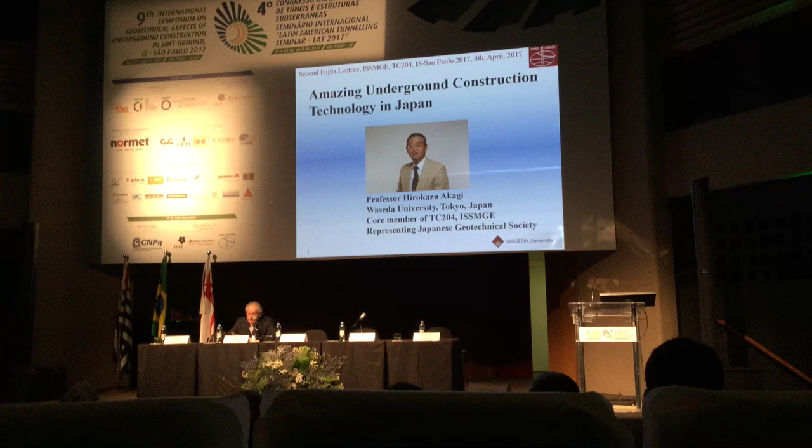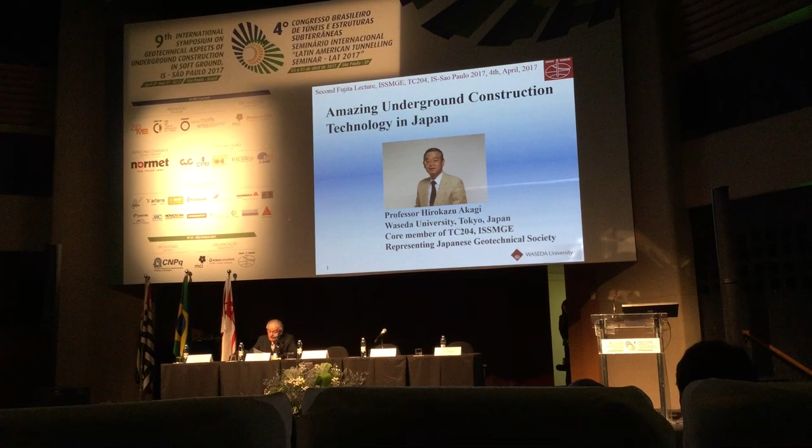As chairman, Professor Fujita organized a one-day international symposium in New Delhi, just before the 13th International Conference. This was an outstanding success, bringing together specialists in underground construction from many countries. Following that success, it was decided to initiate a series of two-day international symposia on geotechnical aspects of underground construction in soft ground, with a third day devoted to technical site visits to underground construction projects.

This international symposium has been held every three years over the past ten years, as follows: 1996 in London, 1999 in Tokyo, 2002 Toulouse, 2005 Amsterdam, 2008 Shanghai.

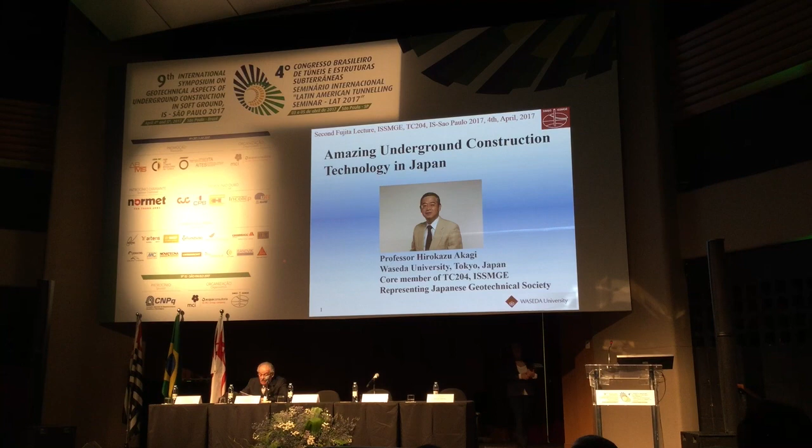For each of these international symposiums, there has been a wealth of information published in the proceedings, with many hundreds of papers on a wide variety of underground construction topics of major technical interest, mainly on case histories and new research. Professor Fujita was the inspiration for this highly successful international symposium, and we all owe him a great debt of gratitude.

At the next international symposium in May 2011, to be held in Rome - this was written in 2010 - we will fondly remember Professor Fujita as the father of TC28 and a great inspiration to us all.

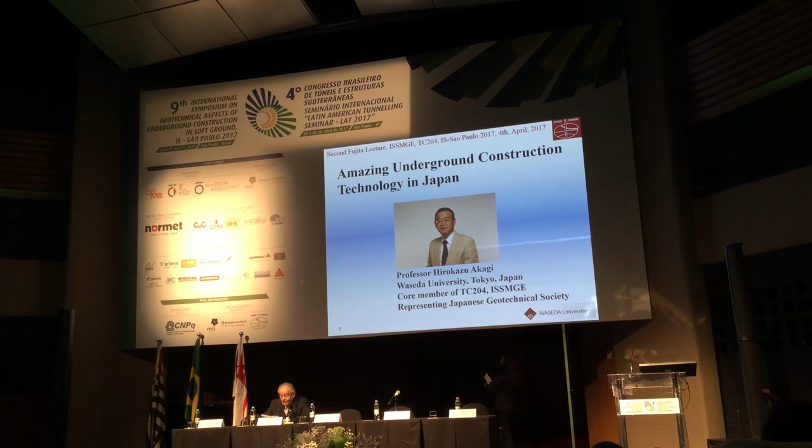It will be proposed that a prestigious lecture in memory of Professor Fujita, to be named the Keiichi Fujita Lecture, will be delivered at each subsequent international symposium on geotechnical aspects of underground construction in soft ground. The Fujita Lecture will be a lasting tribute to Professor Fujita's remarkable contributions.

Professor Fujita's wisdom and experience, combined with extraordinary energy and a great sense of humor, will be sorely missed. Those have been the words of Professor Robert Mair in September 2010, and this is a full explanation why we are here today to listen to a Fujita

lecture by Professor Hirokazu Akagi. It's not a coincidence that Professor Fujita and Professor Akagi are both from the Japanese society or the

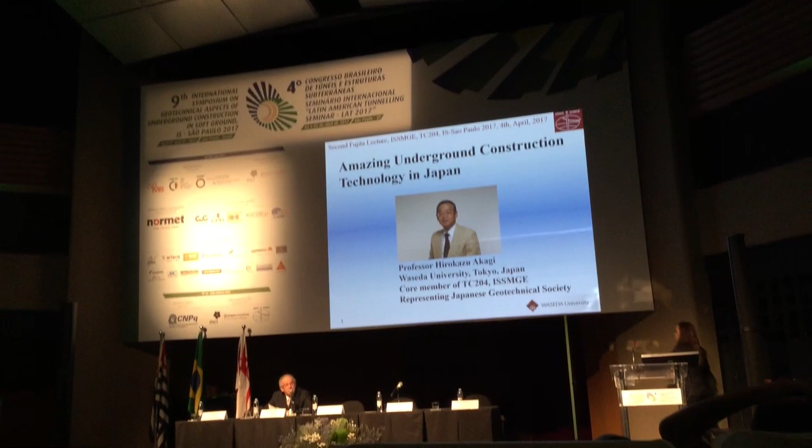It's not a coincidence that Professor Fujita and Professor Akagi are both from the Japanese community. Certainly this is due to the excellence of the geotechnical work done in Japan, and the Japanese society is one of the most active societies existing.

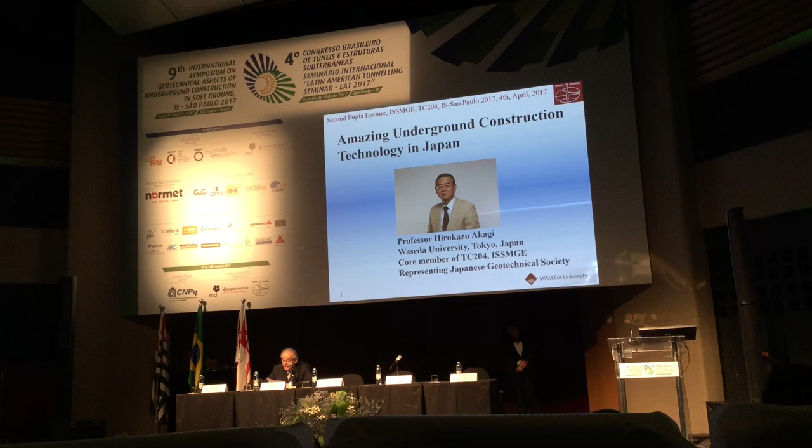Professor Fujita was born in Japan. He was educated at Waseda University. He was a lecturer, associate professor and professor at Waseda University, and a visiting researcher at the University of Canterbury. He was a board member and vice chairman of the Tunnel Engineering Committee of the Japanese Society, general reporter for some international conferences, and he had many research topics.

And I would like to invite Professor Akagi to deliver his presentation.

Thank you, Mr. Chairman. I'm Hirokazu Akagi, and I'm coming from Waseda University, Tokyo, Japan.

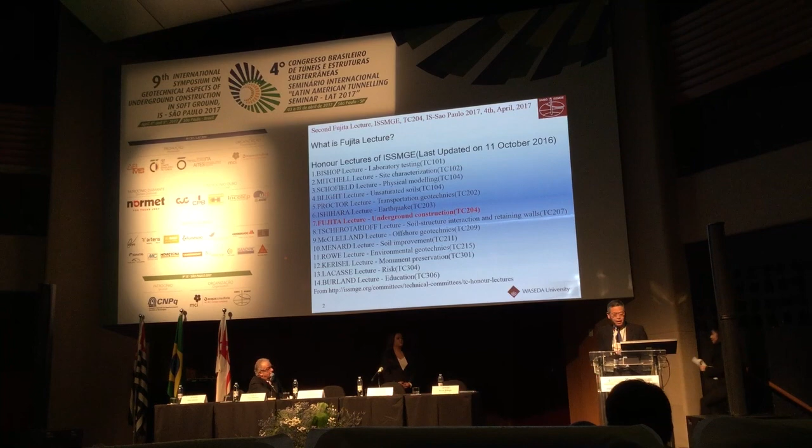I'm one of the core members of TC204, ISSMGE, and also representing the Japanese Geotechnical Society here. As already explained by the chairman, I'll show you what this lecture is.

These are the lists of honor lectures of ISSMGE, which was updated last year.

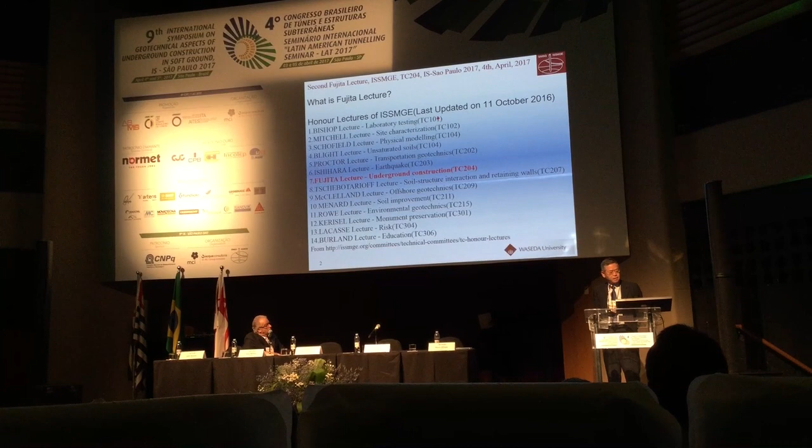Each Technical Committee of the International Society has its honor lecture. For example, TC101, on laboratory testing, has the Bishop Lecture. TC102, on site investigation, has the Mitchell Lecture. TC104 has the Schofield Lecture. TC106, unsaturated soils, has the Blight Lecture. TC202 has the Proctor Lecture. TC203 has the Ishihara Lecture. And our own TC204 has the Fujita Lecture as well.

And also Tschebotarioff, McClelland, Menard, Rowe, Kerisel, Lacasse, Burland - very distinguished names are here.

In 1994, he delivered the state of the art report on soft ground tunneling and various structures at the 13th International Conference on Soil Mechanics and Foundation Engineering in New Delhi, India. The same year, TC28, now TC204, held its first symposium in New Delhi.

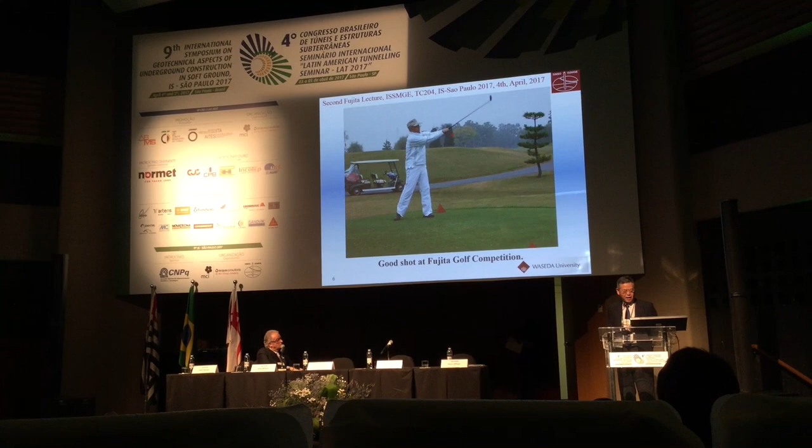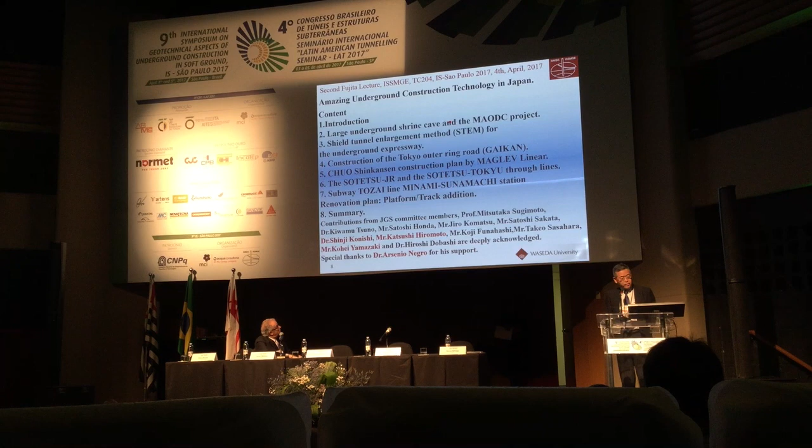In the first chapter, I show you a simple introduction of my lecture, and I'll cover 6 big projects which are done mostly in Eastern Japan.

The first project is large shrine cave and the MAODC project. MAODC means Metropolitan Area Outer Discharge Channel Tunnel Project.

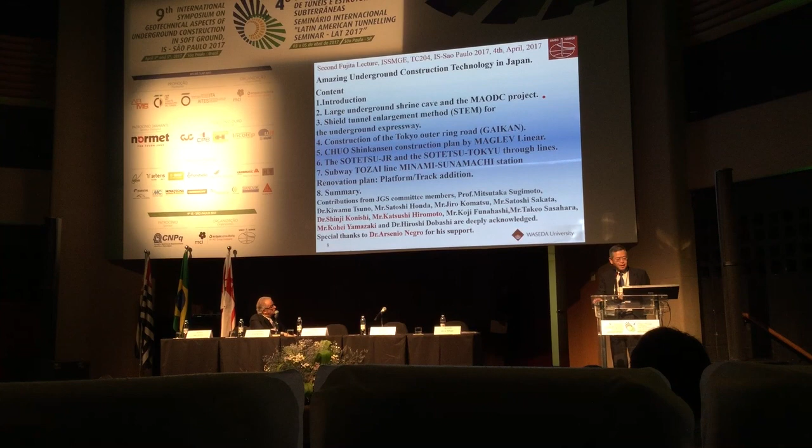The third chapter, I will show you Shield Tunnel Enlargement Method, STEM, for the underground expressway. The fourth is the construction of Tokyo Outer Ring Road, which is named Gaikan.

Also, the fifth topic is on Chuo Shinkansen construction plan by Maglev Linear. And sixth, the Sotetsu-JR and the Sotetsu-Tokyu through lines.

As the seventh topic, is subway Tozai line, Minami-Sunamachi Station, renovation plan, platform, and track addition. And finally, I'll show some summary.

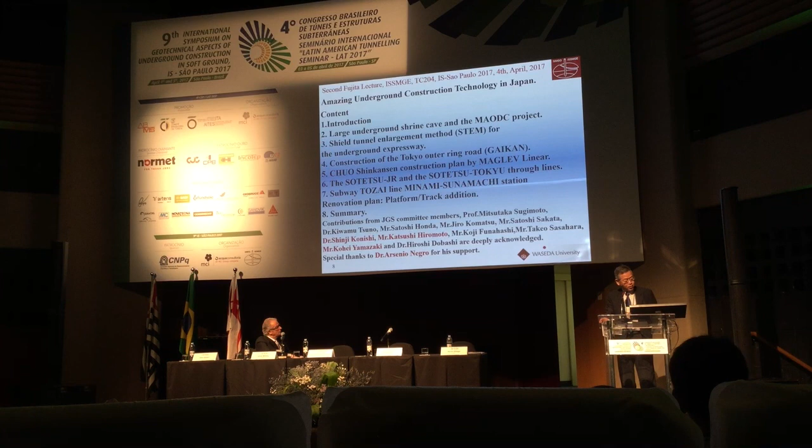For this second lecture, JGS, Japanese Geotechnical Society, has organized a special committee to prepare this lecture: Professor Mitsutaka Sugimoto and Dr. Kiwamu Tsuno and Mr. Satoshi Honda and Mr. Jiro Komatsu and Mr. Satoshi Sakata and Dr. Shinji Konishi and Mr. Katsushi Hiromoto and Mr. Koji Funahashi and Mr. Takeo Sasahara and Mr. Kohei Yamazaki and Dr. Hiroshi Dobashi, deeply acknowledged.

And also, I have to show special thanks to Dr. Arsenio Negro for his support.

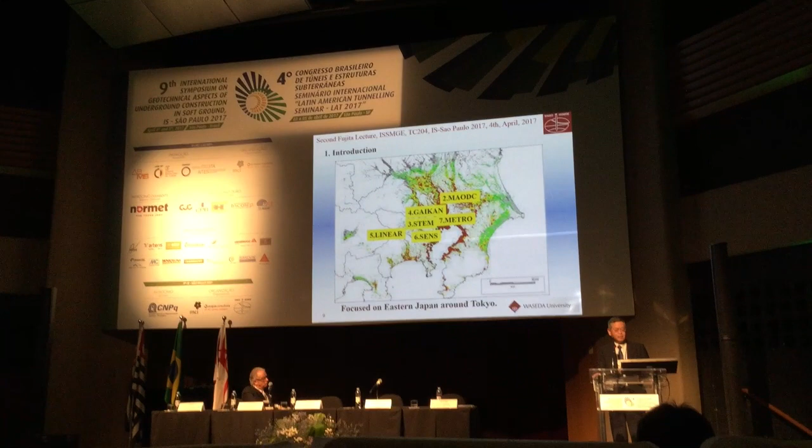And the seventh one is the renovation of existing subway stations by the Tokyo Metro. I show here that all the topics are focused on Eastern Japan around Tokyo.

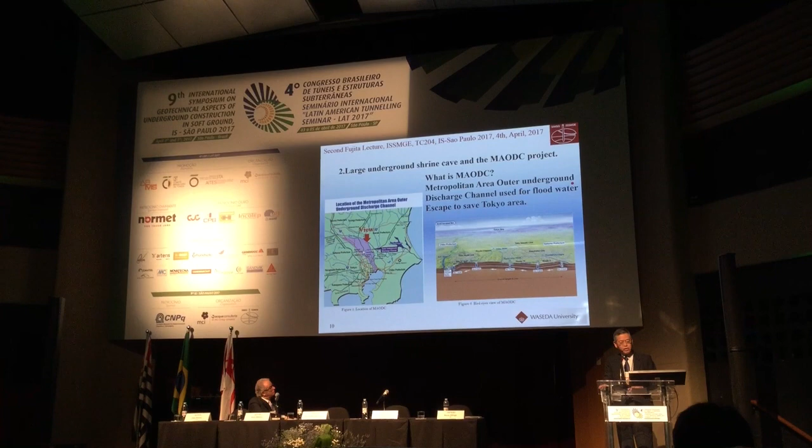As chapter 2, I show the large underground shrine cave and the MAODC project. What is MAODC? Metropolitan Area Outer Underground Discharge Channel, used for flood water escape to save the Tokyo area.

This line shows the discharge tunnel. In other words, this is an underground river which escapes the flood water to save the Tokyo area.

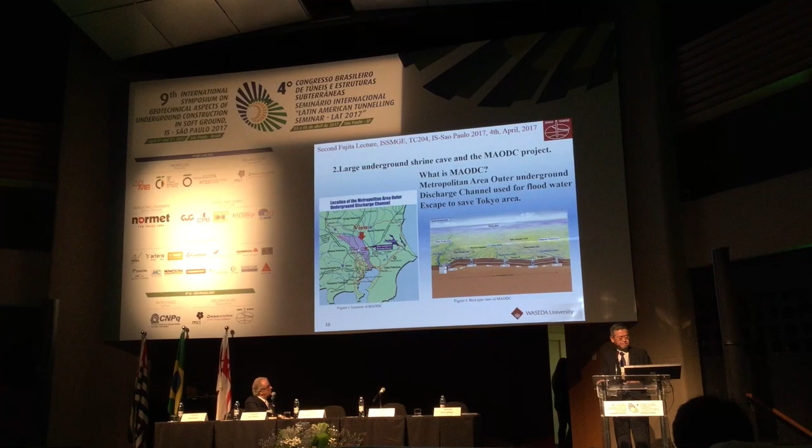This figure 2 shows the bird's view of MAODC, viewed from this direction. That's why the flood water is coming from the right-hand side to the left-hand side.

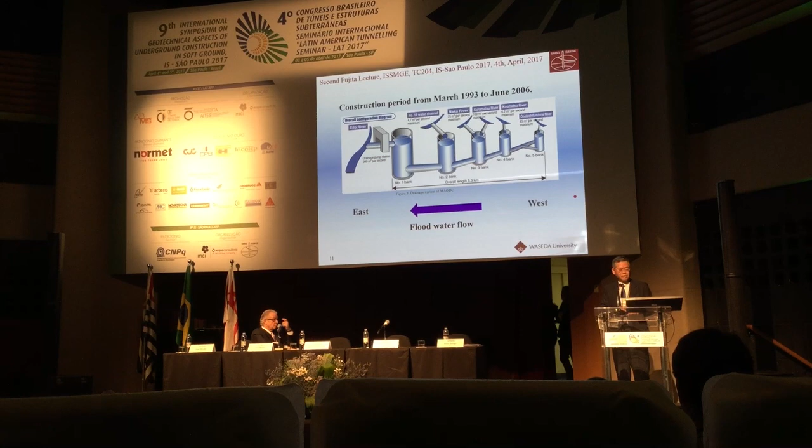This slide shows the magnification of the MAODC. This underground river was constructed from March 1993 to June 2006, almost 10 years ago.

There are 5 big shafts, which are named as banks. These 5 banks are connected by the shield-driven tunnel, and flood water is coming from west to east, and the flood water is discharged to this river, Edogawa.

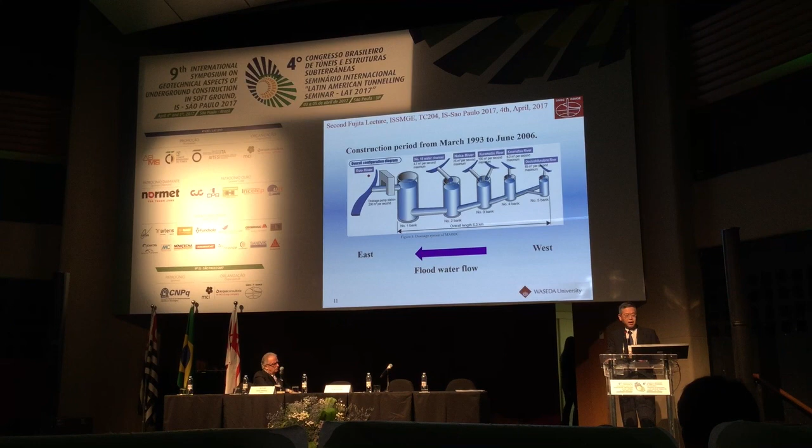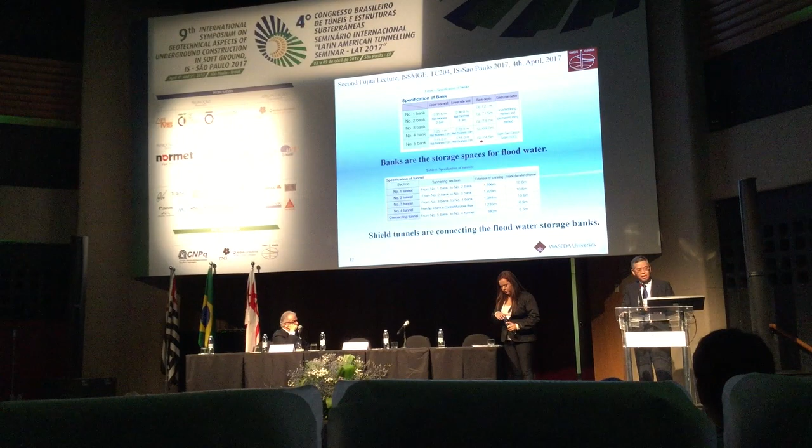These tables show the specification of the shaft bank and also the tunnel which connects these shafts. Banks are the storage spaces for flood water, and the inner diameter is around 30 meters shown here, and the depth is around 72 meters from the ground surface. Quite large and deep shaft.

Also, shield tunnels have a diameter around 10.6 meters, and extension of 1.4 kilometers and almost 2 kilometers, as shown here. Shield tunnels are connecting the flood water storage banks.

This picture shows the bank shaft, deep around 70 meter depth and large diameter, and the 30 meter diameter has been built by using the inverted lining method, the top to bottom excavation as shown here, using the quite thick wall, thick diaphragm wall method.

This slide shows the large diameter, around 12-meter slurry TBM was employed, and special concrete segments have been easily and rigidly connected by the push and bonding connectors, which reduces the construction period as shown here.

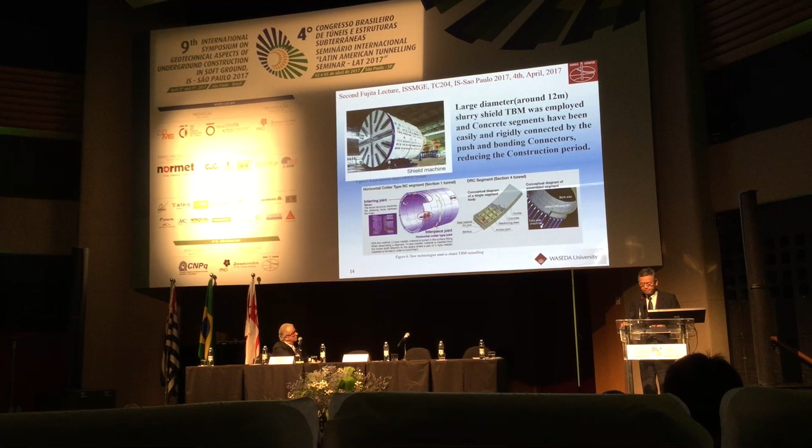This MAODC reduces flood damage resulting from the maximum rainfall occurring once every 10 years, that is 270 millimeter rainfall in 48 hours.

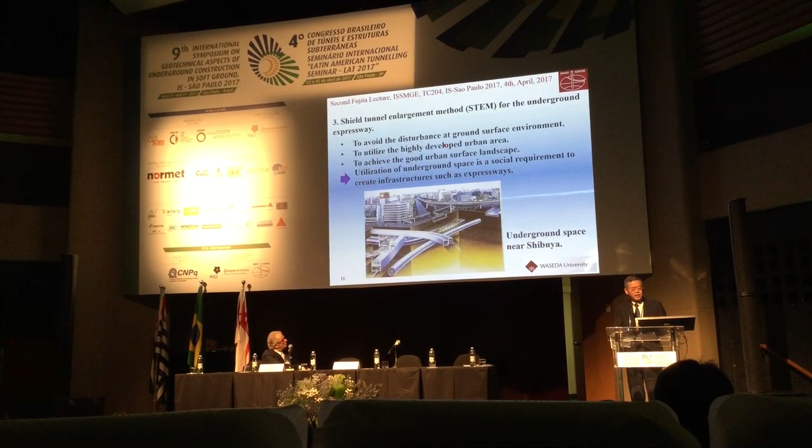This chapter shows the Shield Tunnel Enlargement Method, STEM, for the underground expressway. The reason why this method was created is to avoid disturbance at the ground surface and to utilize the highly developed urban area and achieve a good urban surface landscape. That's why utilization of underground space is a social requirement to create infrastructures such as expressways.

This picture shows the underground space near Shibuya. Shibuya is one of the big cities within the Tokyo area.

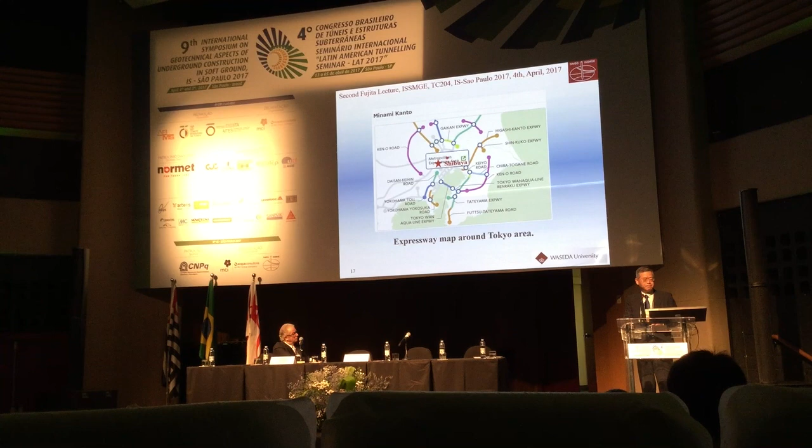This map shows the expressway around the Tokyo area. There are 3 ring roads as shown here, and also some radial expressways as shown here. The Metropolitan Expressway Company is responsible for building the ring road named Gaikan.

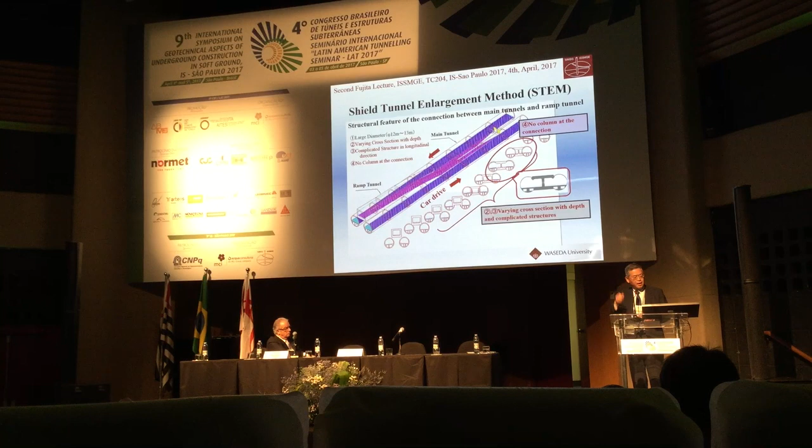Sorry, expressway. This figure shows the shield tunnel enlargement method, STEM.

This figure shows the structural feature of the connection between the main tunnel here, car drive here, and also in the case of expressway, we need a diverting and merging section as shown here.

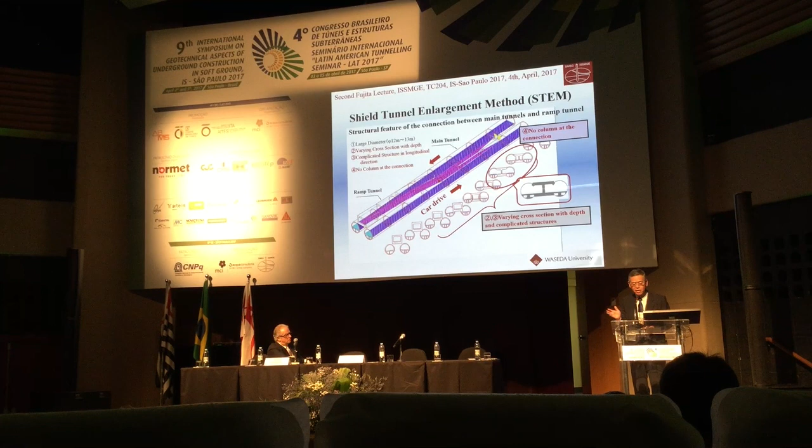The main tunnel is used for the trunk line, and this pink colored one is another tunnel used for the merging traffic from the ground surface to the main line. Also many lanes are going through this direction, and that's why when the diverting traffic is going up through this tunnel, as shown here.

And the tunnel is quite large diameter, 12 meters to 13 meters, and also the shape of the cross section is changing with depth. That's why it is a quite complicated structure in longitudinal direction, and also there's no column at the connection.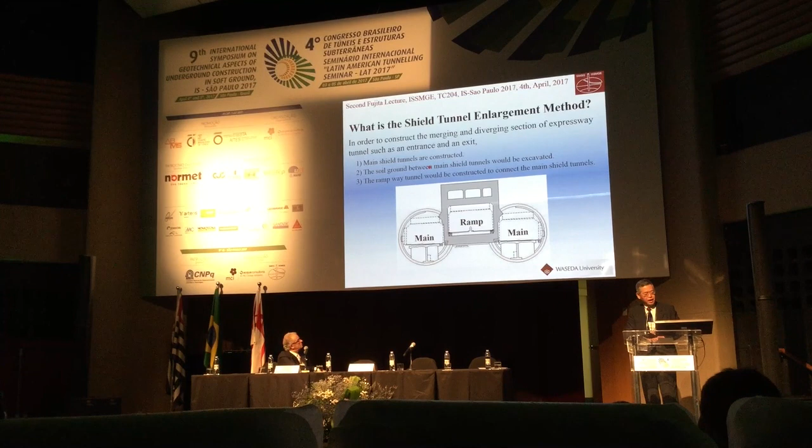And what is the shield tunnel enlargement method? In order to build the merging and diverging section of expressway, tunnels such as an entrance and an exit to the expressway.

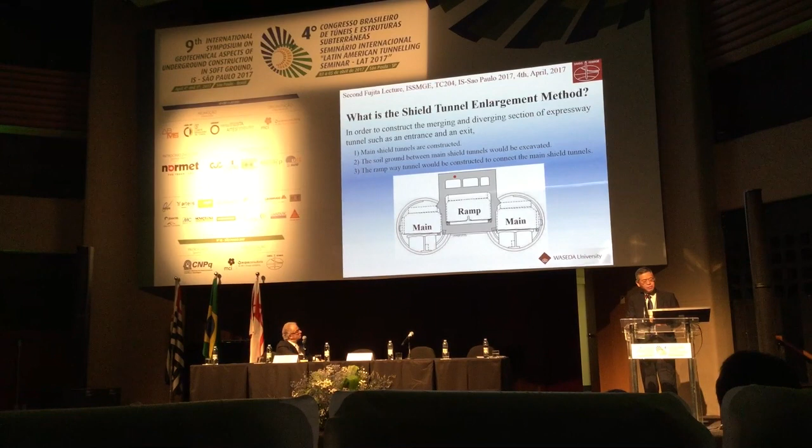As a first step, main shield tunnels are constructed as shown here by the shield TBM. The second step is the ground between main shield tunnel and here would be excavated, and the rampway tunnel would be built to connect the main shield tunnel actually here.

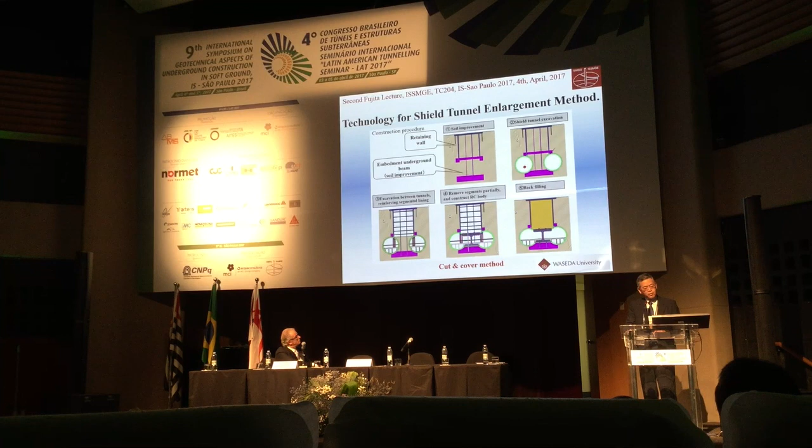This figure shows the technology for shield tunnel enlargement method, which is using the cut and cover method. This green circle shows the main shield tunnel, and from the ground surface, the excavation is done to connect the main shield tunnels. Then, after the construction, the backfilling is done, as shown here.

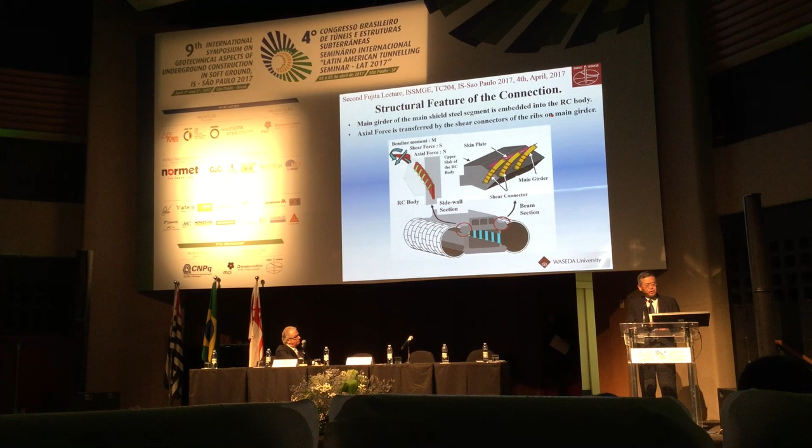This picture shows the connection between main shield tunnel and ramp tunnel, as shown here. Main girder of the main steel segment is embedded into the RC body, as shown here. Also axial force is transferred by the shear connectors of the ribs on main girder, as shown here.

And I'll show you another method with full trenchless method, which means without any cut and cover method. This red colored one shows the ramp launching shaft.

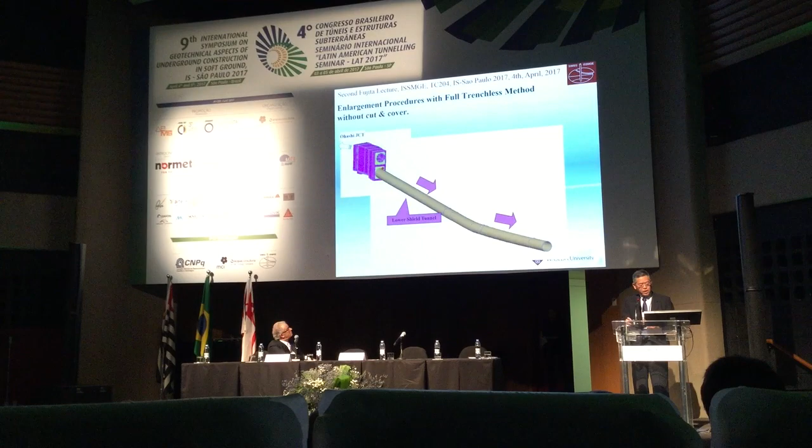First, the lower ramp tunnel was built. Second, the upper ramp tunnel was built, as shown here. Then main shield tunnels are built, as shown here.

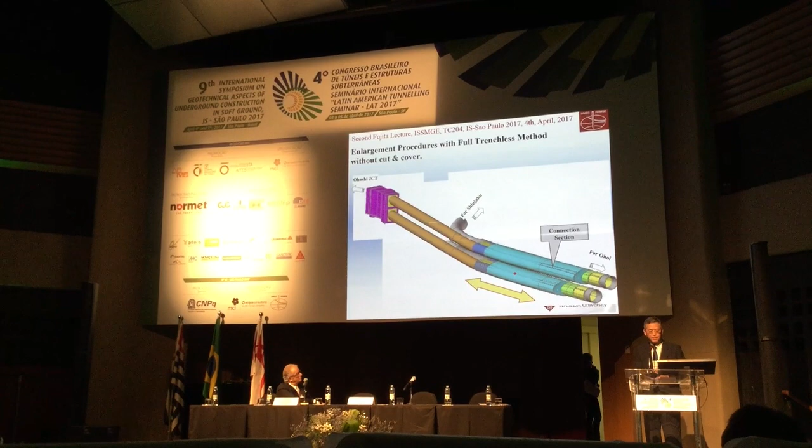And we need to connect these main tunnel and ramp tunnels. Without any cut and cover method, we built the connection section, as shown here, within the tunnel.

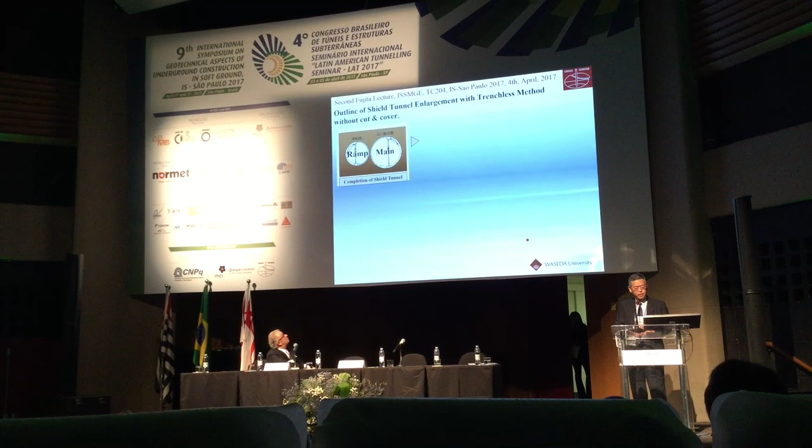This figure shows the outline, the steps of shield tunnel enlargement method with trenchless method without cut and cover. The first figure, as shown here, main tunnel is here and ramp tunnel is here. Then excavation of the upper half, as shown here, by mountain tunnel method with top steel segment, as shown here.

Then the excavation of the lower half by mountain tunnel method with bottom steel support. And excavation of middle portion and removal of the ramp tunnel and main tunnel segment. The lower part is also removed, completion of the connection.

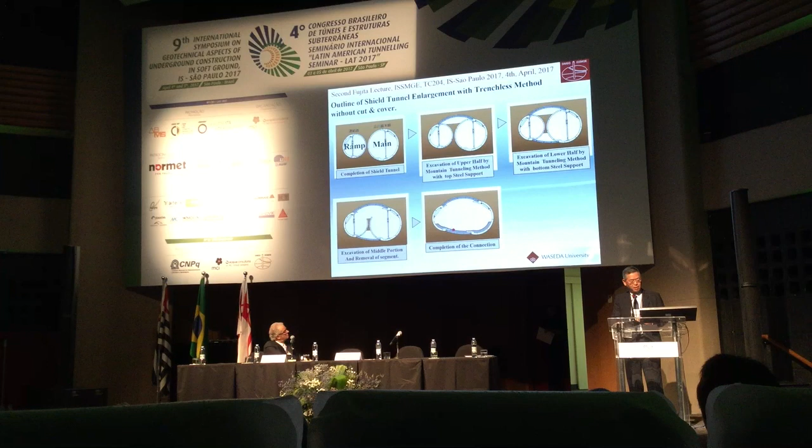And finally, the completion image as shown here.

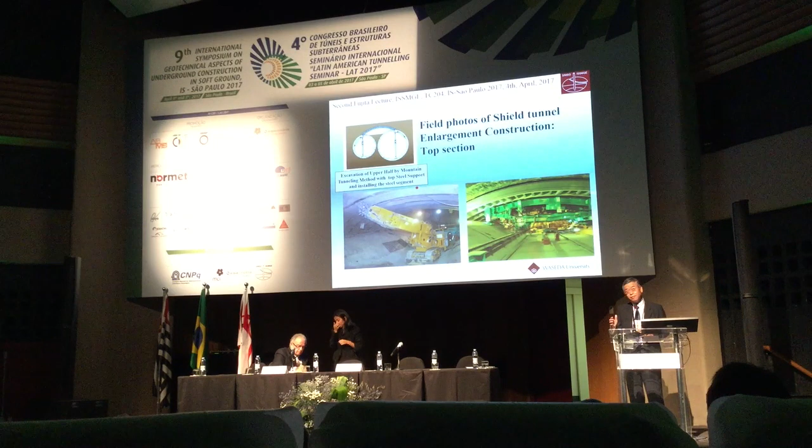This slide shows the actual construction site of shield tunnel enlargement construction at the top section, this section. Excavation of upper half by mountain tunnel method. Mountain tunnel method means there's no support of the face. And installing the top steel segment is shown here.

The next slide shows the bottom section, excavation of lower half by tunnel method, mountain tunnel method. This one should be the main shield tunnel, and also this one is the small diameter ramp tunnel.

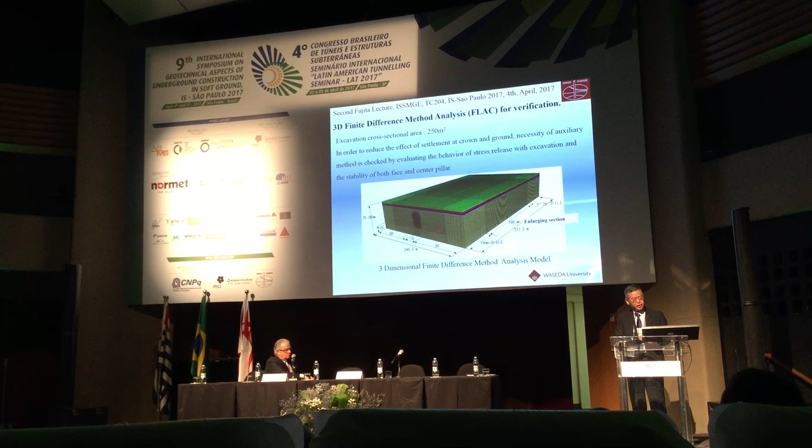In order to use this mountain tunnel method without any support to the face, we have done the 3D finite difference method analysis using FLAC for verification. This is the finite difference method analysis model shown here, and the tunnel is here.

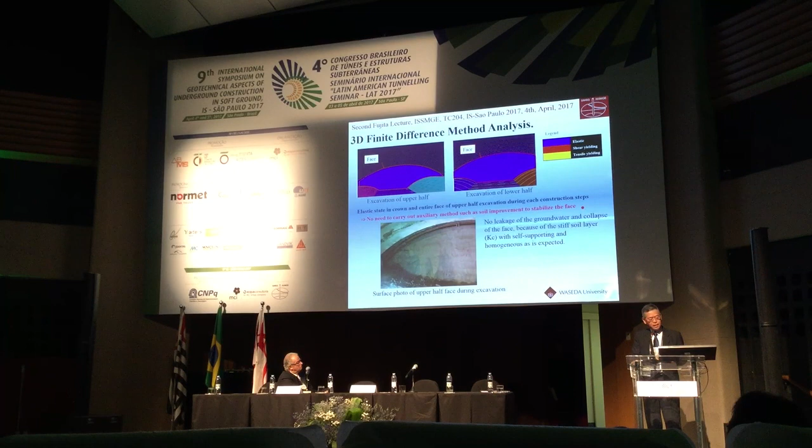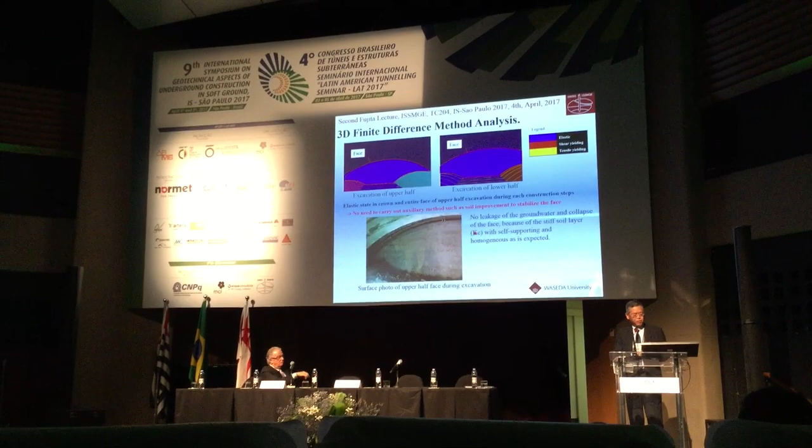Also no leakage, water leakage and cracks of the face, because the soil condition is quite thick soil layer named as Kazusa, with self-supporting and homogeneous as expected. Also there's no groundwater leakage in this case.

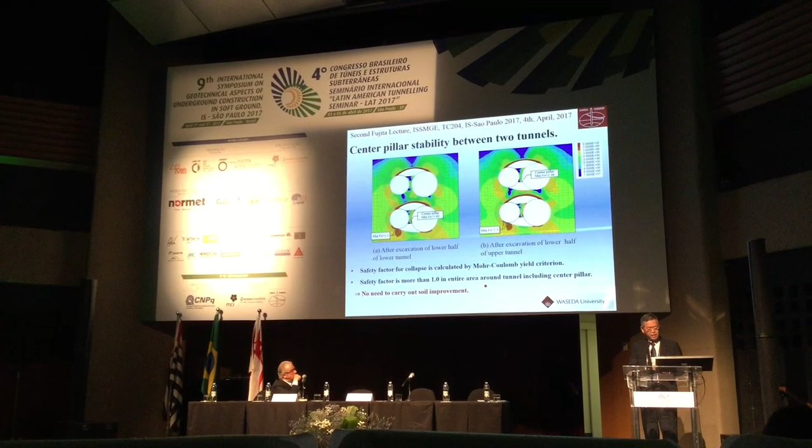This picture shows the distribution of safety factor, which was obtained by FLAC. Safety factor for FLAC is calculated by Mohr-Coulomb yield criterion, and the safety factor is more than 1.0 in the entire area around the tunnel, including the center pillar. That's why we decided no need to carry out improvement.

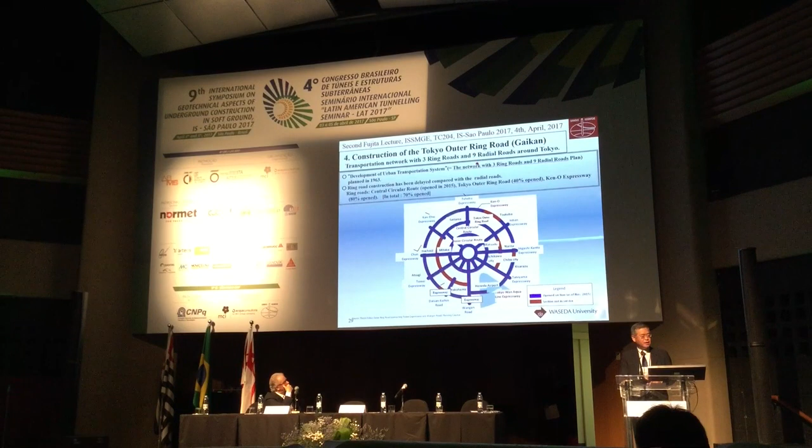This original plan was published in 1963. Ring road construction has been delayed compared with radial roads. The central circular road opened just two years ago. The Tokyo outer ring road, this second ring, is around 40% open. The most external outer ring road, named Ken-O Expressway, is around 80% open. In total, for the ring road, 70% has already opened.

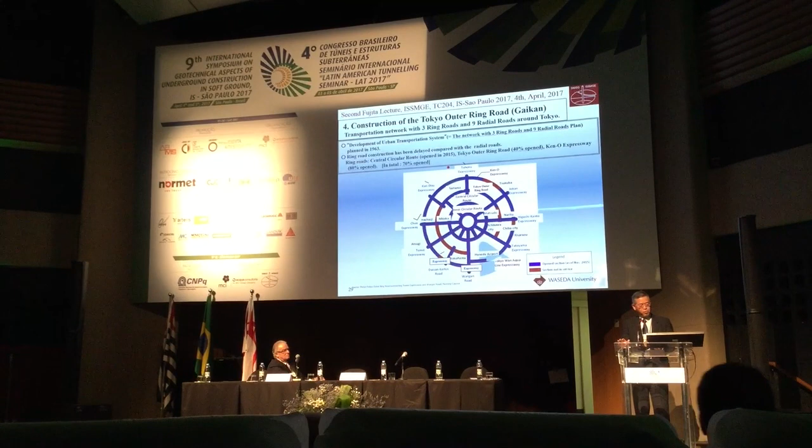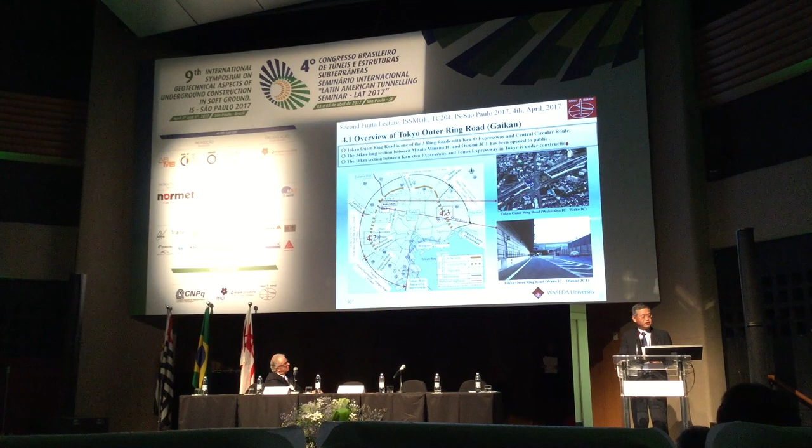I'll show you two case records for this Tokyo outer ring road. This road is one of three roads with the Ken-O Expressway and Central Circular Route. The 34-kilometer long section between Misato Minami and Oizumi—Misato Minami is here, and Oizumi is here—has already opened to the public.

And the 16-kilometer section between Kan-etsu Expressway—here, Kanyetsu Expressway—and Tomei Expressway, here, is under construction.

This expressway is built under the first deep underground road construction, and we have a special law in Japan. What is the special law? This figure shows the content of the special law.

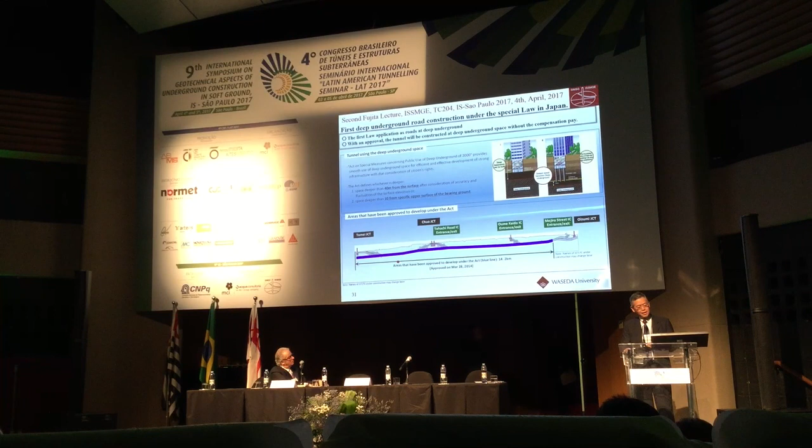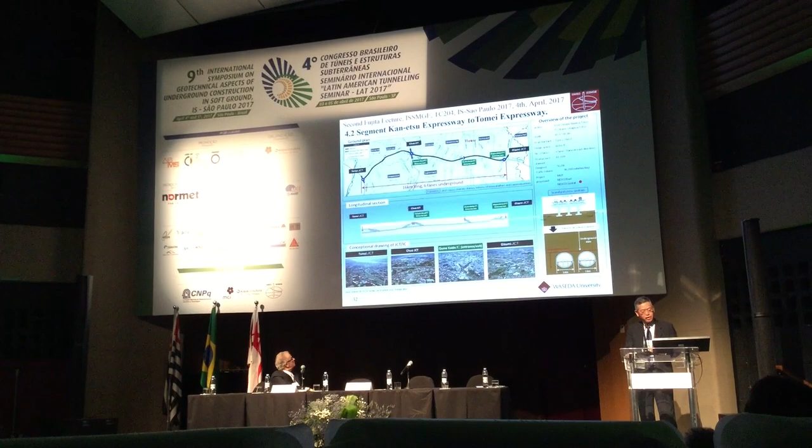The soil condition is quite similar to the Metropolitan Expressway, as I mentioned before. But in this case, the groundwater is expected to leak. That's why we have to be careful of soil stability when adopting the mountain tunneling method.

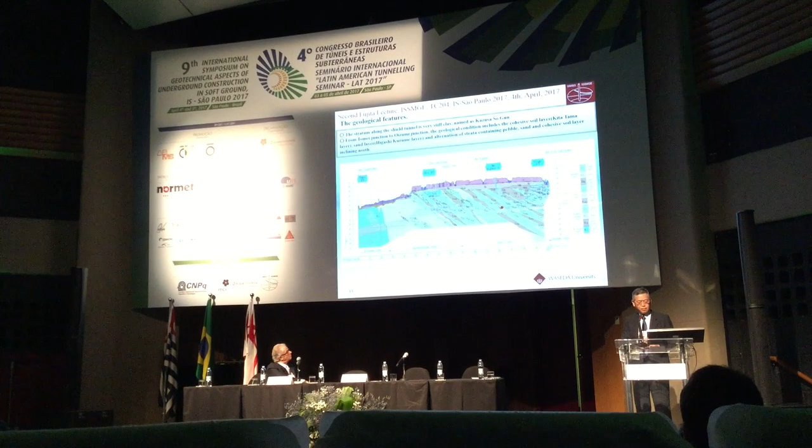The shield tunnel diameter is the largest one. Construction by a 16-meter diameter EPB type shield machine is planned to be used. The southbound tunnel and northbound tunnel will switch their position to this point, and 4 TBMs will be joined here.

So we have to connect 4 machines within the soil. That's why we need to be careful to build this connection.

We also need to enlarge the tunnel for diverging or merging at the entrance or exit of the highway.

In order to ensure safety during construction and long-term stability, the company plans to adopt a basically circular geometry shape, which provides a sufficiently wide zone of water cut-off performance, as shown here. We need to keep quite high water tightness, which is why at present I think we need to use the soil freezing method to build this underground space enlargement.

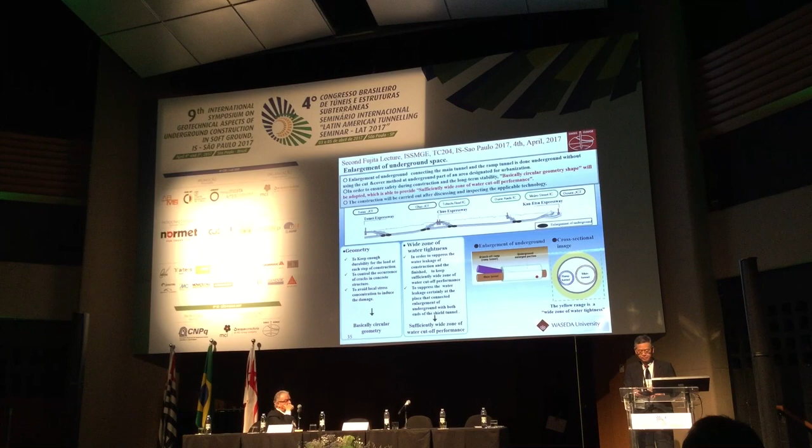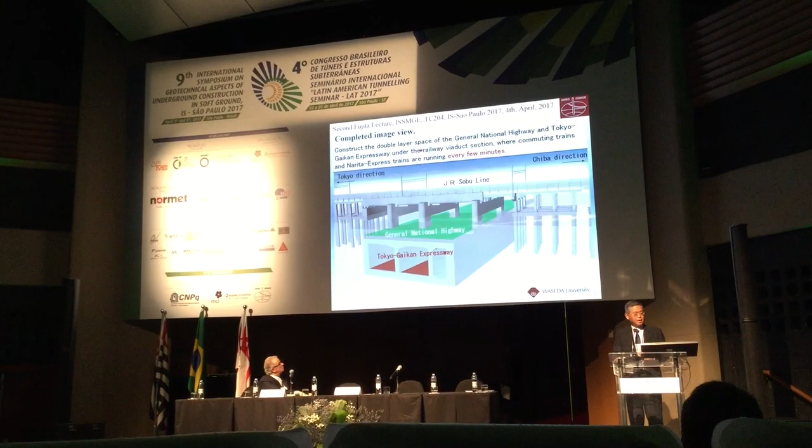This slide shows the complete image view and construction of a double layer space for the General National Highway and the Tokyo Gaikan Expressway. The top of the General National Highway is here, and underground, the Tokyo Gaikan Expressway runs through below.

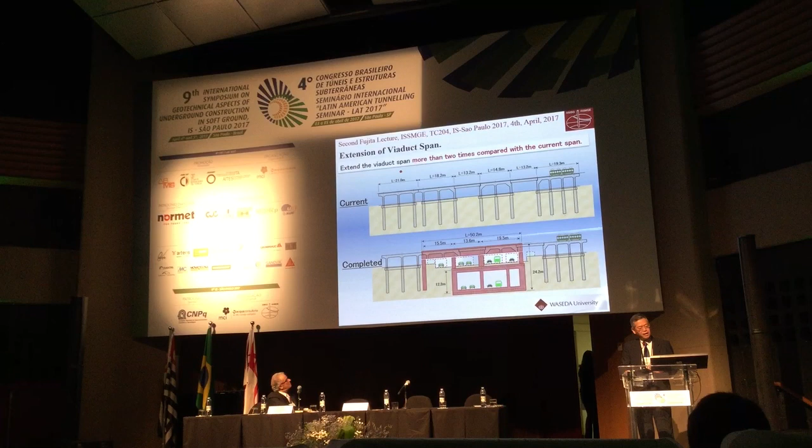The railway viaduct, the JR line, is here, where commuting trains and Narita-Express trains run every few minutes. That's why we need to extend the current viaduct span—more than 2 times the current span. This is a completed section, so we need to build new red-colored box, pillar, and girder structures.

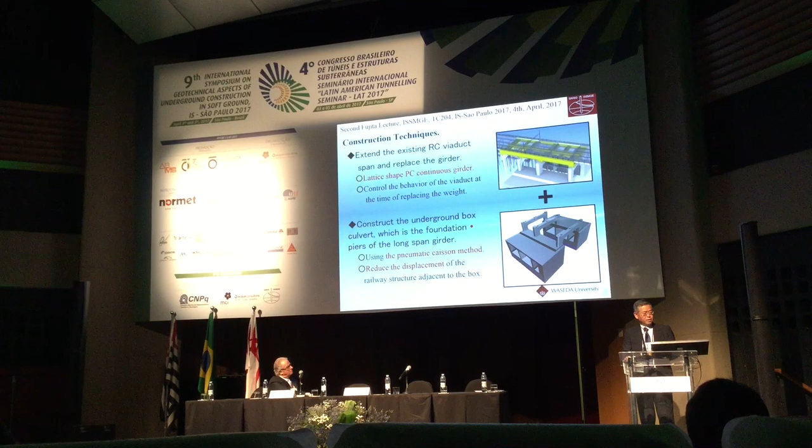Two techniques are adopted: extend the existing RC viaduct span and replace the girder, and construct the underground box culvert, which is shown here.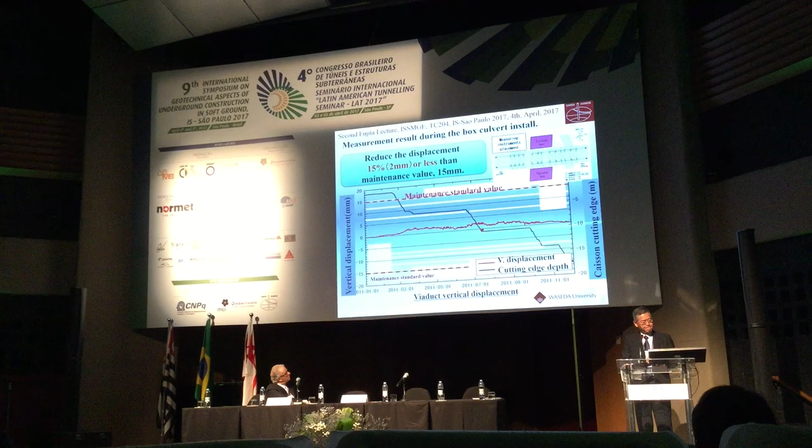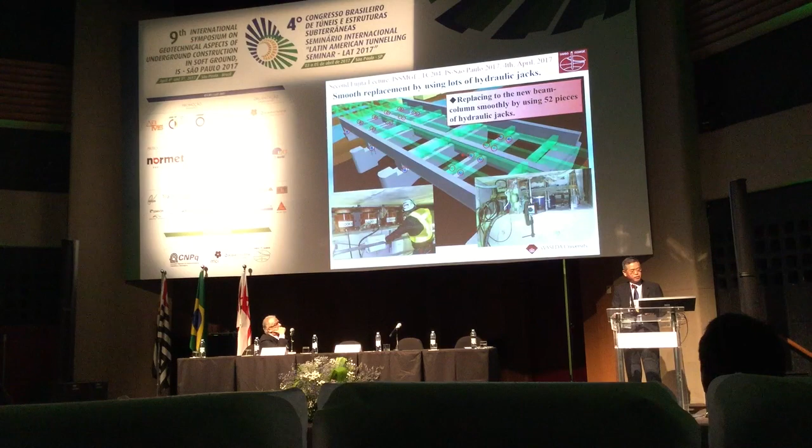So there are lots of hydraulic jacks used to replace the weight onto the new piers. This picture shows before replacement, and this one shows after replacement.

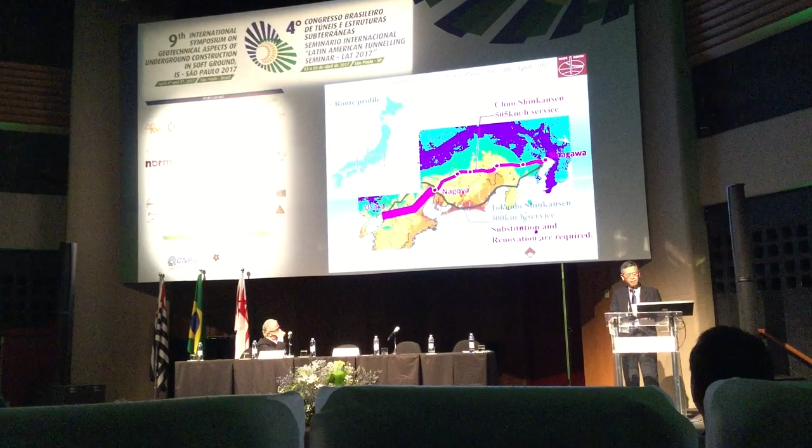This figure shows the longitudinal route profile. The extension is around 286 kilometers, of which the tunnel is 246 kilometers, going through the Japanese Southern Alps and Central Alps mountains. The maximum cover is around 1,400 meters, over a 25 kilometer long stretch.

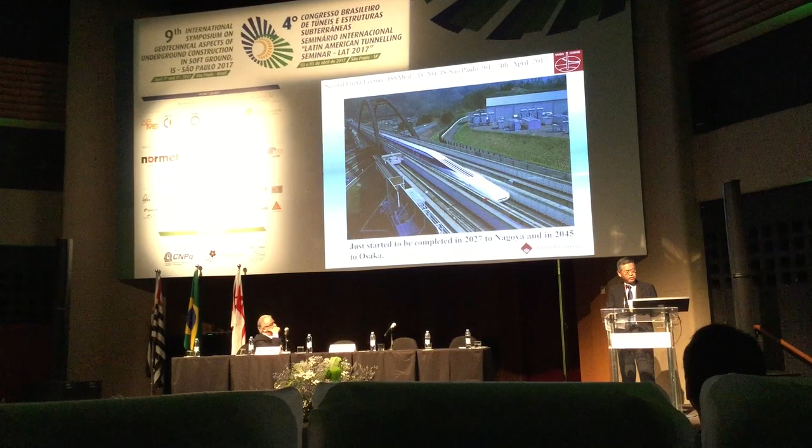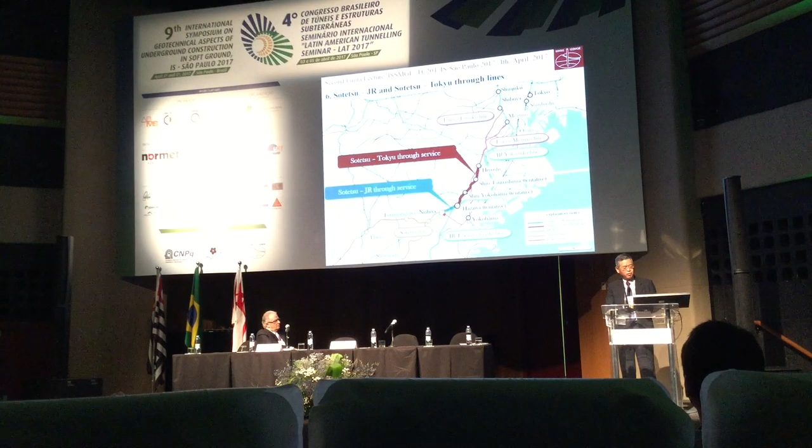Chapter 6 is the Sotetsu-JR and Sotetsu-Tokyu through lines. Sotetsu is a private train company, and Sotetsu is connected to JR, the Japan Railway line. Then Sotetsu to Tokyu is another private train company. So these lines connect, with the Sotetsu train going into central Tokyo.

In this project, SENS is used. SENS is an acronym for Shield tunneling method and Extruded concrete lining, NATM System. This method was used to build the Tohoku Shinkansen and Hokkaido Shinkansen in 2008 and 2012. For this line, the new Nishiya Tunnel and Hazawa Tunnel will be built using this SENS method.

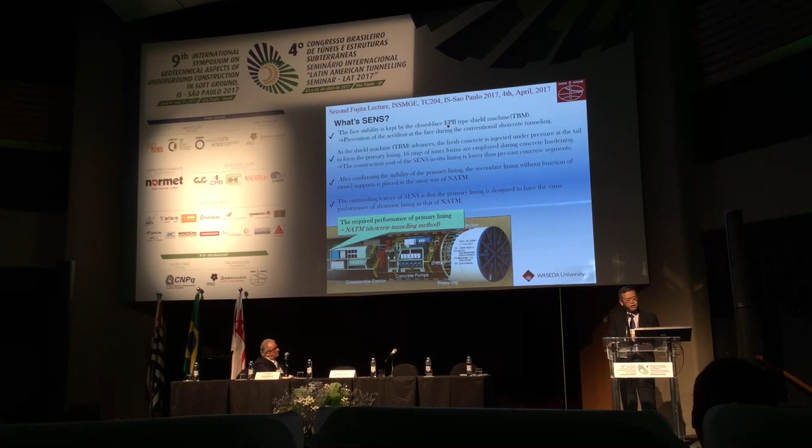What is SENS? The face stability is kept by the closed-face EPB type shield TBM. The face is stabilized and grout is injected behind the segment. After stabilization, the secondary lining without the support function is placed in the area.

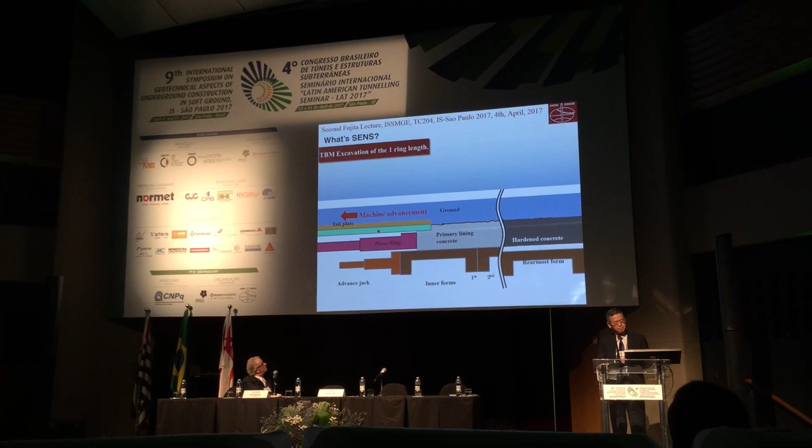This picture shows how these two lines are built. The TBM is going through the left direction, and the inner forms are disassembled and assembled in the TBM tail, as shown here. This is the primary lining, or fresh concrete, injected behind the machine.

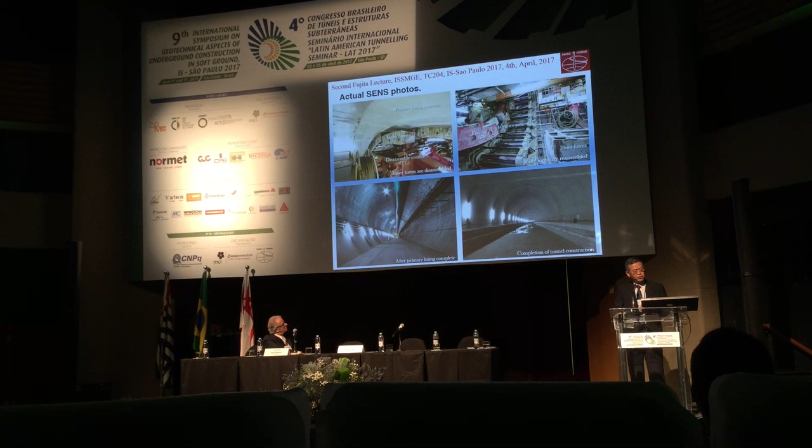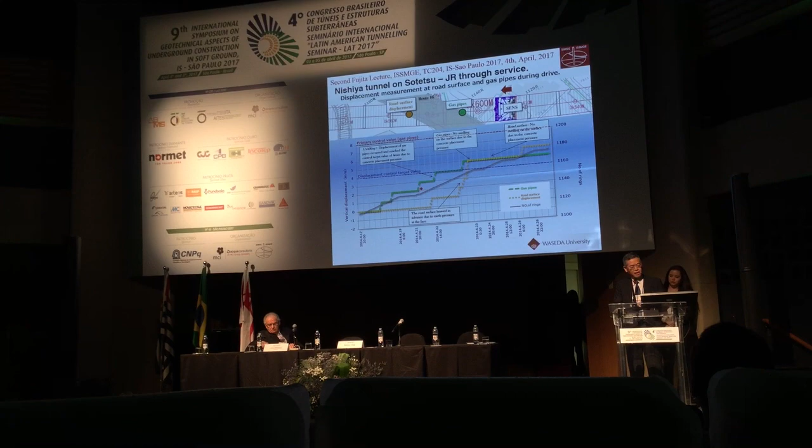This picture shows actual SENS machines. The first Nishiya tunnel has already been completed, and the measured results show better control of displacement during the TBM driving. Also, the new Hada tunnel is now under construction.

The 7th chapter shows the subway Tozai line, Minami-sunamachi Station renovation. This Tozai line is quite an old subway line, around 30 kilometers long. It started in 1969, 50 years ago.

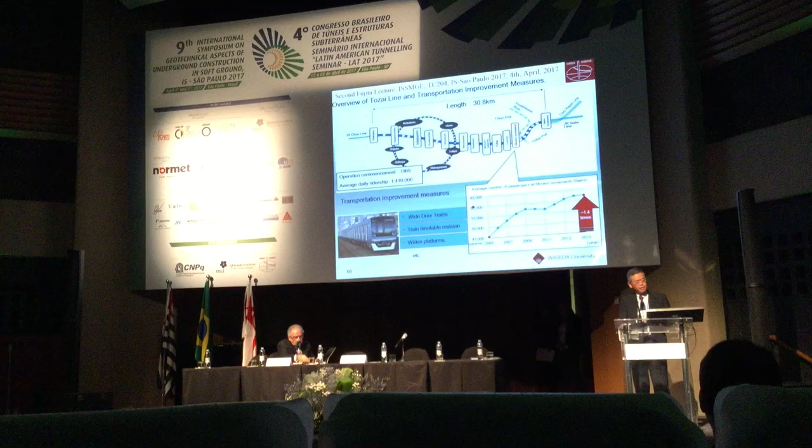The ridership is shown here. The Minami-sunamachi station exists within very soft clay. This picture shows the existing railway station: it's just one platform, with the exit and entrance just at both ends of the platform.

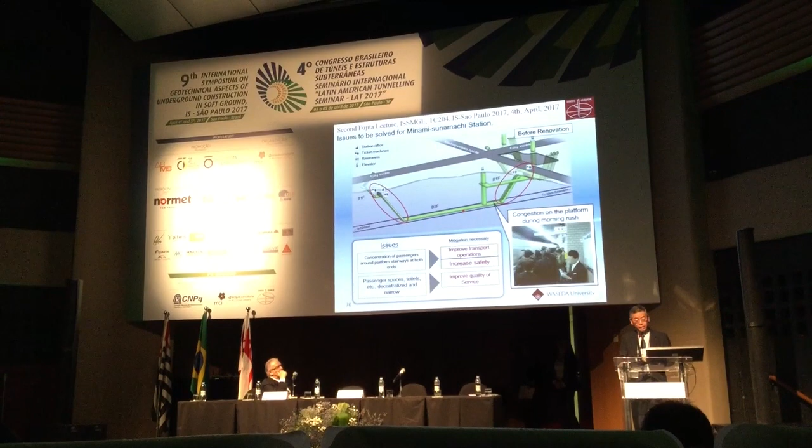That's why, to improve transport operation and increase safety, we need to renovate this existing station. After renovation, the number of platforms is increased, and the exit and entrance are also increased, as shown here.

Also, the existing station is as if floating within very soft clay. That's why we need to improve the ground below the new station, and by increasing the number of platforms, we'll be able to improve train traffic.